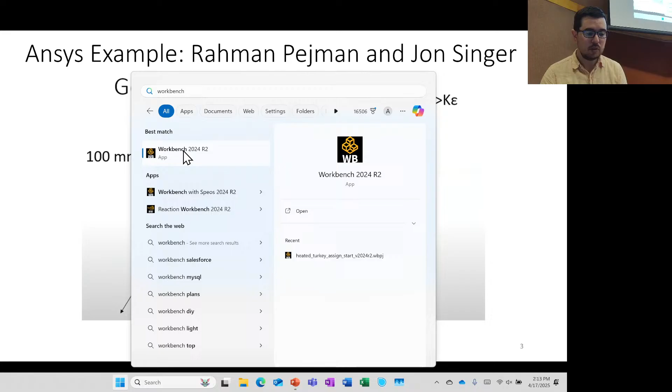So we're going to open up Workbench, and first run a 2D simulation. And then Rahman does a nice job of taking that 2D and showing you how you can create a 3D, essentially copy and pull the thing to have some thickness, and then run the simulations again. So we're going to be first working with Fluent, and then later, if we get it to work, we'll get Fluent to talk to Static Structural, and that will be the one-way coupling. So here we go. We're going to do geometry 2D, and we're going to open up SpaceClaim.

And while SpaceClaim is doing its thing, let's analyze the geometry a little bit here. We're going to be 200 millimeters wide, 100 millimeters tall. Okay. We've got 1 centimeter per second for the flow on the inlet, and the Reynolds number is going to be about 1,000. So how is that calculated? Well, that was calculated by, let me see if I've got it.

Oh, pen. So the Reynolds number here, if my pen will work. Oops. No. Okay, let's see what happened. Whoa. Okay, so the Reynolds number is going to be rho times velocity times some distance, okay, or some length.

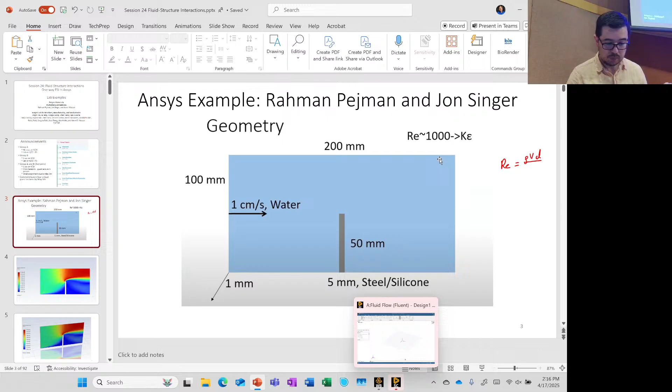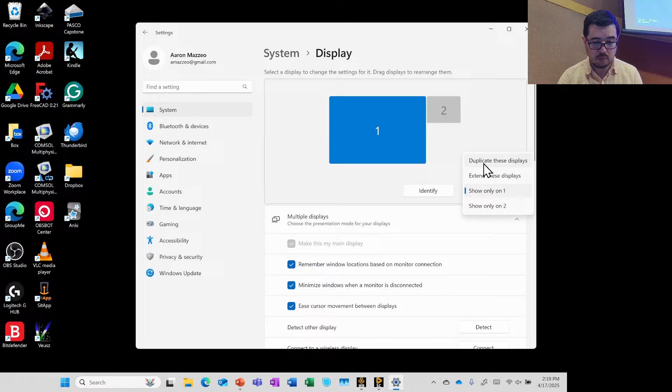You gotta be kidding me. This has happened before, when everything, oh no, oh no. It was bugging out a little bit before. Let me try this other cable. See, that makes sense. No, it works. It takes so long. What's up? All right. Sorry, it works. All right.

So we get rho VD over mu for the Reynolds number. Density of water, anyone? 1,000, right? Kilograms per meter cubed. This is going to be 0.01 meters per second. And the distance we're going to use is going to be this 100 millimeters, that height. So this is going to be the 0.1 meters.

The viscosity of water. Anyone? Fluent database, click, water, liquid, copy, close, forget about it. All right, that's what we normally do. Okay, so the viscosity of water is 1 millipascal second. Okay, so 0.001 Pascal seconds. All right. So now let's get to the geometry.

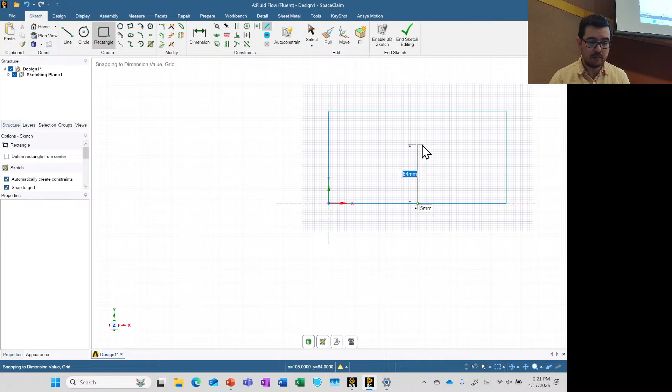In SpaceClaim, we go ahead and we click on the Z. We click on the sketch plane. We can click on that again, I guess. We click on the rectangle. We're going to do the 200 millimeters wide, 100 millimeters tall. That was just a tab. And then enter. And then we'll put in that center pillar. So you can come over here and it says a center line. All right. And we'll click on that. And then we're going to do 5, hands off mouse, tab, and then we're going to do 50, enter.

Okay. Then we come over here and we hit the select button and we drag it over the geometry. Okay, and we can click fill. All right, and it does this. Then we come over here to the surface and we're going to detach them, detach all. Because we want to be able to separate the fluid portion from the solid portion. So we hit detach all. And now we see we have 2 surfaces.

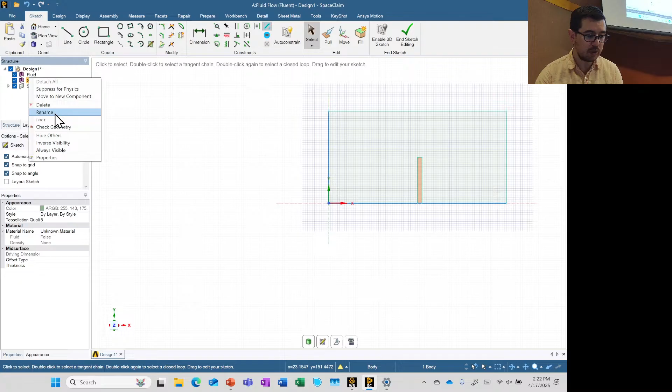This one we're going to rename fluid portion. And this one right here is the solid portion. Okay, and Rahman says we click that box to get rid of that so we don't have that activated. And we should be able to go. So we just do close on that. And that should bring us back into Workbench.

Okay. For the mesh, when I've double clicked on this and started doing the meshing, I get an error. Maybe it will come up, maybe it won't this time. That was something that was kind of unique compared to what happened in the 2022 version. So what I do is I just close it and I try again, and that seems to have taken care of the error that came up.

With this part of the problem, we're only going to be looking at what's going on with the fluid, right? Because we're doing the one-way coupling, okay? And so first we're solving the fluid problem. So this is kind of like a problem where you have fluid over an internal body. And we're not going to do the deep convergence, right? Okay. So let's see. It's still thinking. Let's just go back here for a minute while it's thinking.

The fluid flow rate, the inlet. Well, we're going to end up specifying inlets. We're going to end up specifying a fluid structure interaction boundary around here. This is going to be the outlet. And then we're going to have symmetry, okay? So that would be like a no shear condition at the top. There's going to be no slip, which is essentially a default for Fluent, on the bottom.

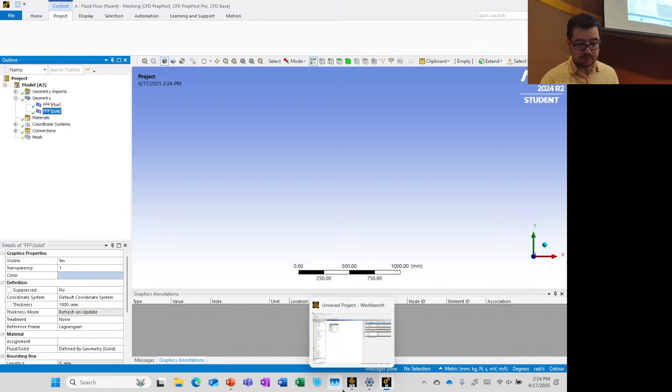So your lab is going to be this, essentially, by the way. So that was the other reason I wanted to do a demo. And I was like, well, I could record it, or we could just do it here. And given how things were going, I decided that we'll try to do it here.

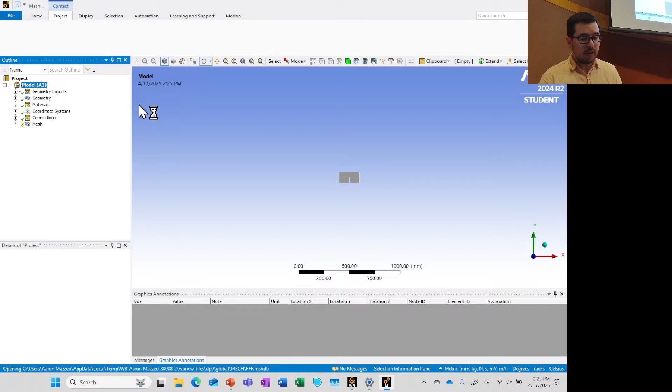So that should be closing, and then now we'll just double click, or I right click or edit, and we open it up. And it should work. Okay, and so now it comes in. I don't know why that happened, but this is good. All right. So we want the fluid, but we don't want the solid. So we're going to go ahead and suppress this body.

Okay, and then we can go ahead and name our inlet and our outlet and our various boundaries of importance. So if I left click on that after I've got edge select and then hit N, we'll call this inlet. This is a reserved name. This top one, N, we can call it symmetry. That also is a reserved name by Fluent. Click on this one, hit N, type in outlet, also a reserved name.

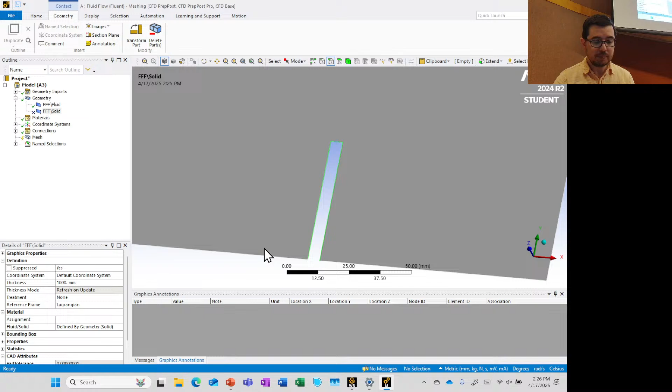And then we need to select, so we did this one, and then control. Okay, I guess I didn't. I thought I got the middle. I guess I better zoom in. Right, like that. Okay, so those three, and I hit N, and we'll call this FSI. So that's going to be where the fluid structure interaction occurs. We hit OK. Then down here, we should see those are where we want them to be.

We go to mesh, and in this case, we're going to use an element size of 1 millimeter. So your settings might be a little bit different. I'm in metric millimeter, right? So if your settings are different, then just make sure you get the right units there. We're going to actually add an inflation where the no slip boundary conditions exist.

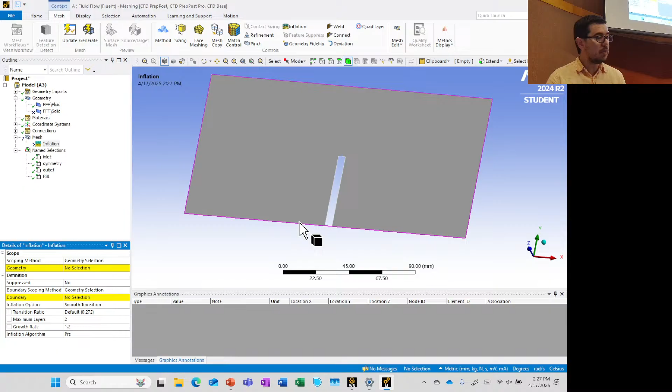Okay, so first we select that whole thing, then, oh, but I have to hit apply. Oh, no, well, first I have to do that, then I have to hit apply. Then we're going to select this one, control, this one, control, that one, and that one. Okay, and we hit apply. We should have 5 edges selected, and we'll go up to 5. Okay, now we can generate the mesh and take a look.

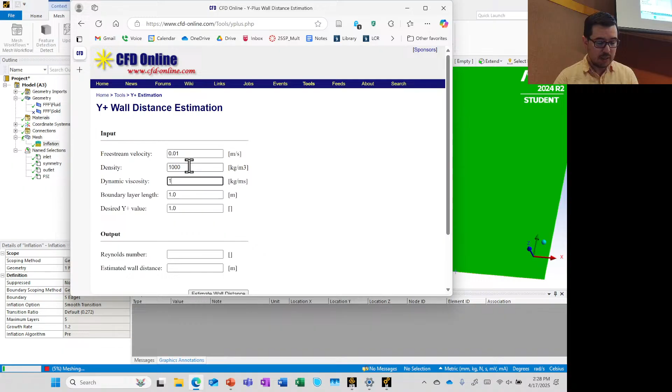While this is happening, you might recall that you can use a y plus calculator, or y plus distance estimator, and we're going to use it for the 2D, but we're going to ignore it for the 3D actually. So you can type in the free stream velocity, which is 1 centimeter per second. The density is 1,000. This is water though, right? We said that we had 1e-3 for our viscosity.

The boundary layer length, is it 0.1 meter or 0.2 meter? We'll just put in 0.1 meter, okay? We keep the desired y plus value at 1, and we estimate the wall distance. So this is saying that we have a Reynolds number of about 1,000, which we do, and for that, you want to make sure that your layer right next to the wall is less than this number. So this is 0.97 millimeters. All right, so it's about 1 millimeter.

So once this thing has been meshed, you can see that it's refined along these no slip boundaries, and you can go in here, and this is not super precise, but you can click on the node, and we can click on, say, that one and that one. Whoops, I said I had to hit control. Now I got neither.

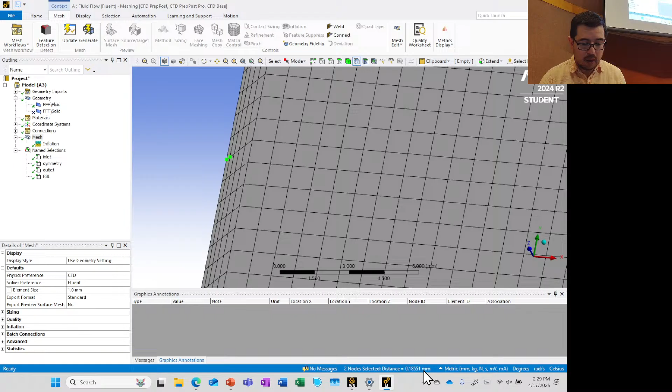Okay, and you see down here, it says it's 0.18 millimeters, 0.19 millimeters, and what did we say? We said it had to be like 0.9 millimeters was what we were aiming for. So the thickness of our elements right next to the walls is less than what you want for your y plus. We'll ignore this in a little bit, okay? But it's just good to have a reminder about this behavior. Okay, so we're good here, and we'll go ahead and hit update.

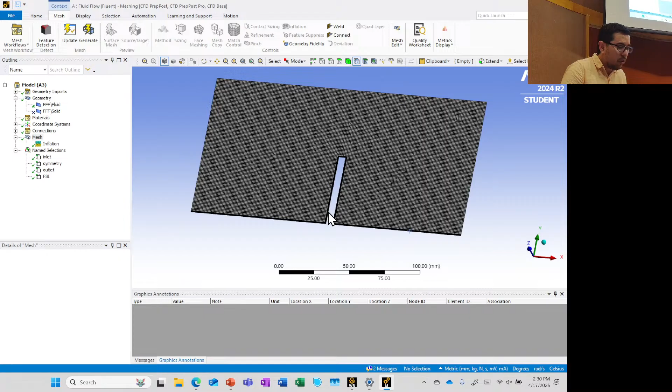And this has been transitioned or translated to Fluent appropriately, okay? Or it's ready for Fluent, I guess you could say. It's going to Workbench, and in Fluent, we're going to use the K epsilon turbulent model. Now, if you like, you can look at K epsilon, K omega, and again, we're doing kind of an impressionist perspective on a lot of these things at this point.

But if you look at which should I use, K epsilon or K omega? If you read this, what it tells us is that it's solving for turbulent kinetic energy and epsilon, or the rate of dissipation of turbulence kinetic energy. And the nice thing for us is this phrase, good convergence. So it may not be super accurate, and we're not necessarily going for accuracy in this demo, but it has a good convergence rate. So this is maybe one that we might want to attempt first.

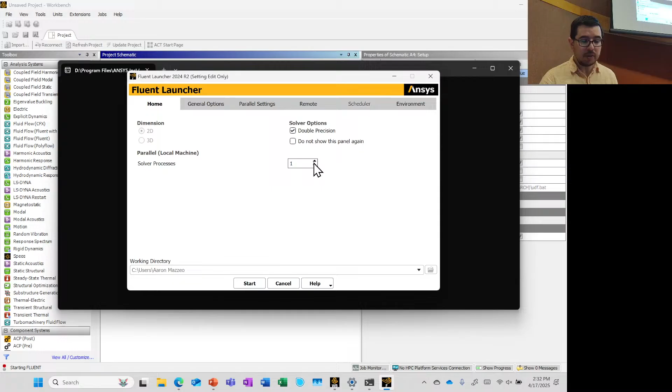K omega, it says more difficult to converge than K epsilon. So that gives you kind of a hint. Maybe I should try K epsilon first. Okay, so now we go into... Oh, I should have clicked on Fluent earlier. To Fluent. And we'll go ahead and do double precision, and we can up it to 4 cores or processors like that, and we hit start.

This is just a 2D simulation, but what we're going to do here is get a perspective on what's happening with the 2D flow, and then we're essentially going to make a 3D slab. It's going to look like a plane strain problem essentially, and that plane strain problem is going to involve a 3D solid model. So we're doing the 2D problem to get an idea of what things should look like in a thick 2D slab, and then we're going to extend it into 3D so that we can solve the solid mechanics problem in 3D, if that makes any sense.

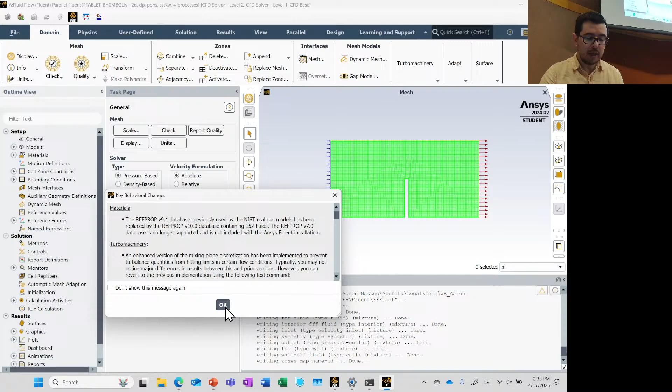Okay, so here, what we're going to set first is our model. It's got SST K omega. We're going to go ahead and use K epsilon. That's what Rahman did. And for the materials, we can look at our fluid material, which is only air. So we'll put a new one in, go into the Fluent database, go down to water liquid, and hit copy. And just to see, the viscosity is 1 millipascal second, or 0.001003.

So we close this, and we can close this, and we see now that we have water liquid. We come over here to the fluid zone, and we can double click on it, or right click on it and hit edit. We're going to change to water liquid, apply, close. For the boundary conditions on the inlet, we're going to have a velocity of 1 centimeter per second coming in on this side. So we'll change that to 0.01 meters per second, apply and close.

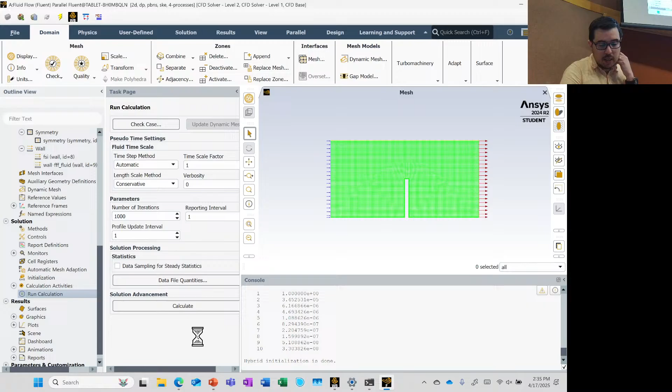This is set, the outlet is set, symmetry should be set, and the walls should all be no slip condition, and we shouldn't have to change them. Stationary wall and no slip. So we come down a little further to run calculation. We double click here, and we can up our number of iterations. We're not going to use all of them, but put in a number greater than 50 or so, and we right click and hit initialize and calculate. It's going to use the default, which is a hybrid initialization, and it should solve pretty quickly.

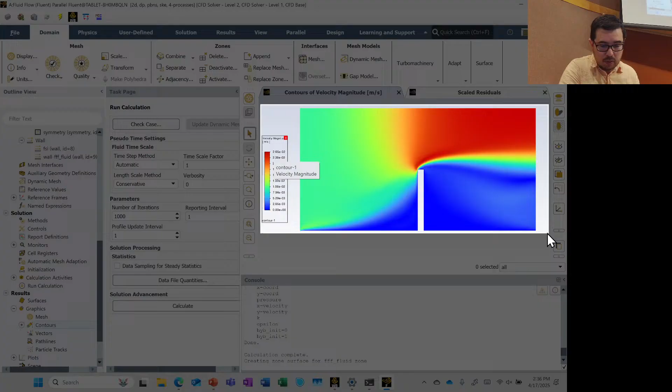Okay, so less than 60 iterations it took. And if we come down here to the graphics, we can click on contours, right click, new, and we'll look at the velocity, save, display and close, and that looks pretty good because we've run it before. You probably can't see it. I'll go ahead and try to copy and paste it. But actually I know what it is because I've done it already.

It's about 2.7 times 10 to the minus 2, so 0.027 meters per second as the maximum. And that lines up with what Matt said at the beginning of class. You were saying it constricts the flow, and so we expect it to speed up. So it goes from an inlet flow of around 1 centimeter a second to over 2 centimeters per second in this region. And it's slower, pretty stagnant down here behind.

Now, no, don't do that.

Please, okay. Last time that crashed everything. So let's go back here and we'll just work here and see if we can get through things. Okay, so this is pretty good. We'll go ahead and close this. And we can hit OK here. Often I say use it, keep it for future, but in this case the top option is fine.

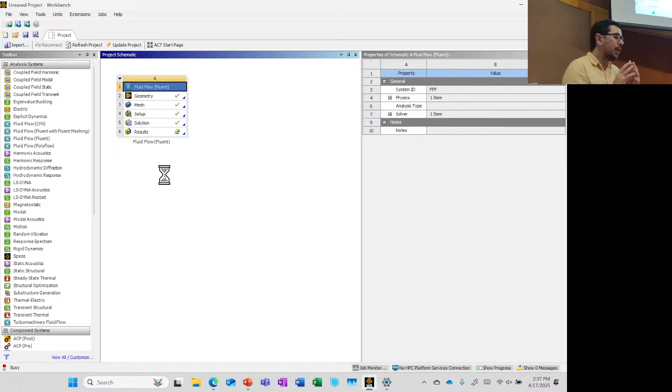So now we go to Fluent, or this analysis, and we're going to right click here and we're going to duplicate. So duplicate, and this is going to lead us to transition to 3D. And again, the reason we're making the fluid flow 3D is just so that we can use 3D structural analysis, or static structural, down here in a minute. So it's thinking about it, and then we click here, and it's 2D geometry, but we're going to change that to 3D.

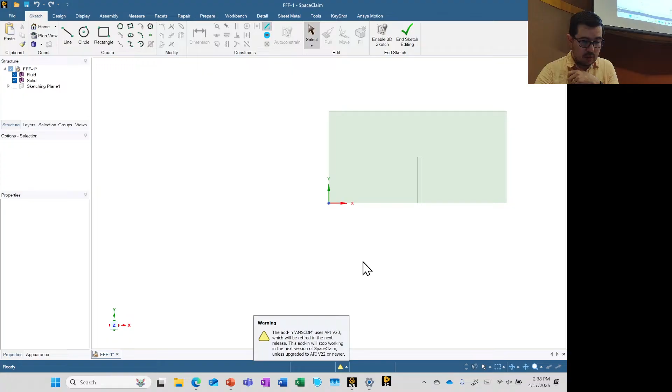And then we're going to open up the geometry in SpaceClaim. So we're going to specify a thickness or a width if you want. So we got this 2D flow, and we're going to kind of pull it out and make it 1 millimeter thick. And we're thinking. All right. So good. It looks like it's come in. That's pretty good. So we can kind of rotate it up. We can zoom in a little bit.

And we can move things over, and we can kind of select everything, and we can do a pull like this. And we click there, and you remember, my left finger is on the mouse still. I hit 1, and then I hit enter, and it's almost still 2D, but it is in fact 3D now. You can see there's some thickness there. In this case, I needed to do pull no merge. All right, so we saw that.

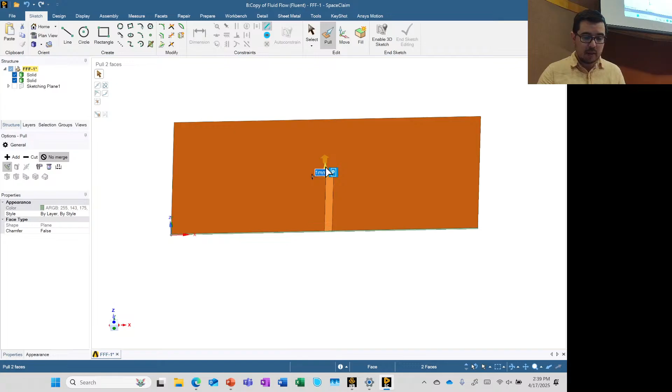So let's go ahead, undo what we just did, come back here, and we do no merge. And then we do a pull. Now do 1. Okay, now there are 2 solids. Once again, we don't want both solids. They're not both solids. One's fluid and one is not fluid. So this one is going to be renamed to be fluid, and this one doesn't need to be renamed, it's solid. That's the middle section.

Okay, I'm not quite sure if this is superstition or what, but I think you're supposed to click on this. Okay, well maybe not. There, it's activated. So you're supposed to click on that, and then we hit close.

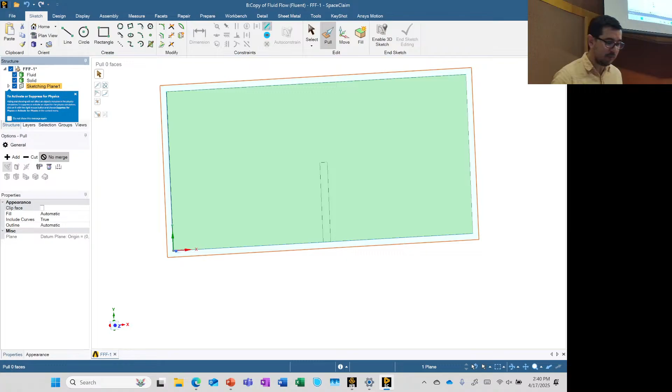Then we go ahead and we're going to work on the mesh. Now, in the mesh, there are going to be a couple things that we have to do. We're still looking only at the fluid portion of the problem. Yes, we're going to take the updates. But you remember those named selections that we had for inlet, outlet, symmetry, they were before applied to edges on the 2D problem, but now we're going to apply them to the faces. And so we'll come up here to the geometry.

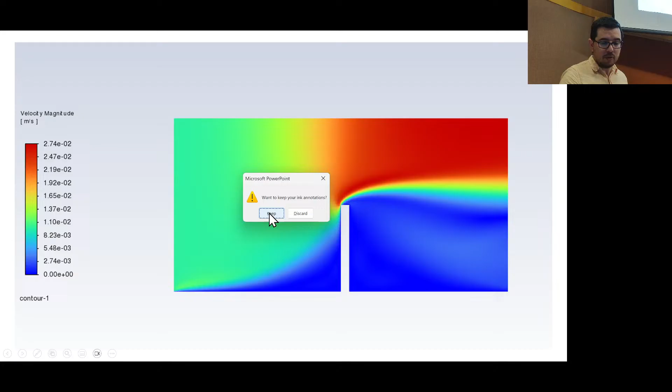Okay, we're still waiting, I guess. Still waiting. While we're waiting, I don't know if I want to do this. Okay, great. It stayed. It did not disconnect. That's good. I was worried it was going to disconnect from the screen. Okay, so here we are.

It's giving us some kind of mismatched scope business. This is a newer thing. I don't really look at this that much, but it highlights. It's newer than 2022 at least. And so when you come into here, you'll see it's saying, hey, there's an issue there.

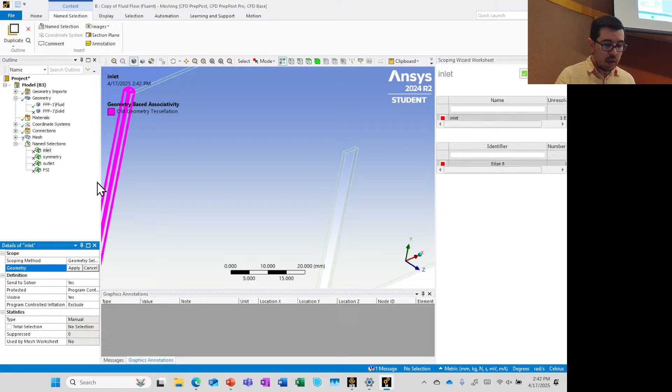But let's first go ahead and suppress the solid again. So we're going to suppress that body because we're only interested in the fluid portion. And we're going to come over here to our named selections on the plus. And the inlet, it's like, hey, there's a problem. So now we're going to use our surface or face selector.

And we're going to, oh no, okay, attempt, there we go, to select that face. And then we hit apply. And so now our inlet is that. Okay, and then over here, it's hard to see again, all right, but we're going to click on that face. We're going to hit

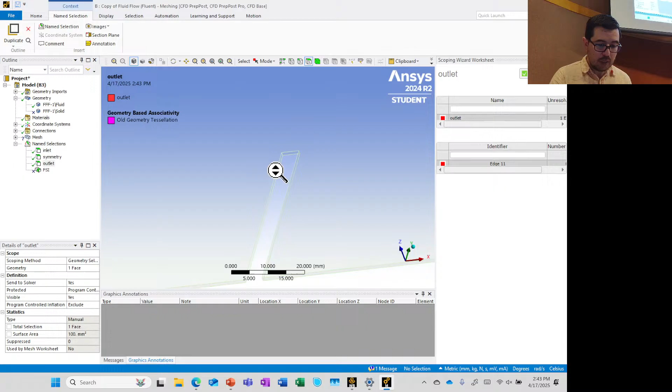apply. Okay. And over here on the back side, we can go ahead and select this face for the outlet and apply. And then down over here, we're going to make these FSIs new. Okay, I didn't even remember it had a couple. But we're going to select this one, hit Control, and then hit, whoops, not that. Hit Control. Okay, so we should have those 3 faces selected. Apply, 3 faces. We're good.

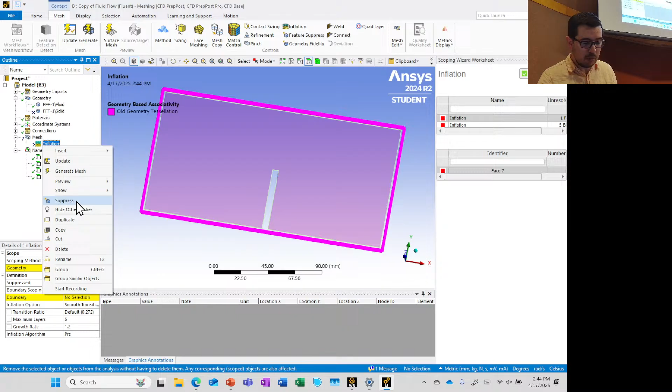Okay, it remembers that we wanted 1 millimeter mesh. Okay, and so that's fine. Now though we're going to take the opportunity to essentially tell it that we want it to have a mesh that sweeps through the thickness of the part. So first we're going to ignore the inflation. This is where we did all that nice y plus calculation work, but we're just going to ignore it for now. So we're going to suppress it, and then we're going to insert a

method that is going to apply to this entire geometry, and we're going to use a sweep. What it's going to do is sweep through this with a quad. We're going to say all quad, so it's going to have square elements on here, and we're going to do this not automatically, but we're going to use a manual source, which is going to be this face, like that. Okay, and then we hit generate.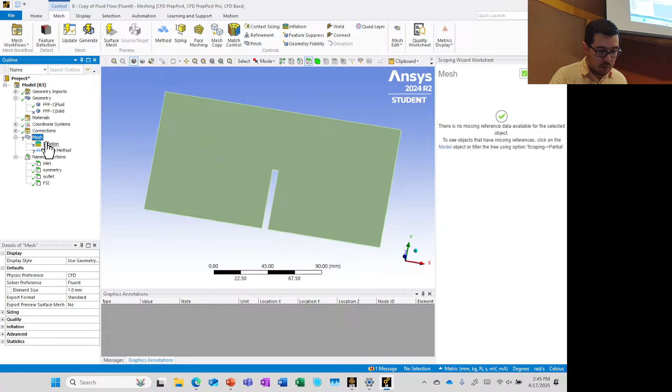It's not associated with any geometry. What? This is a new one, I'm not sure. So this is suppressed. Use geometry. This may be where we end for now. Yeah, we're using geometry settings, sweep method. What is it lacking? I don't know why it would, I don't think it needs sizing there.

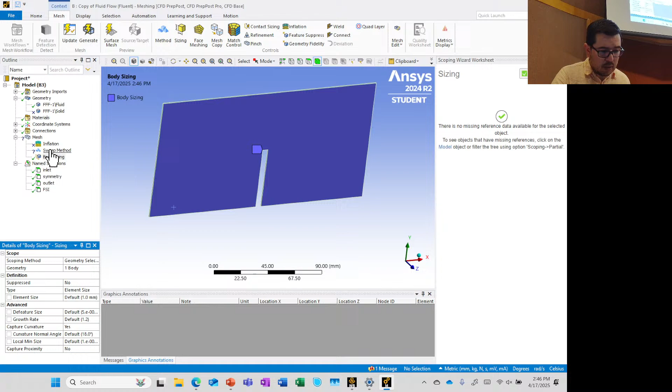Okay, so that's, no, I want it on the whole body. Okay, so that's body sizing. That's 1 millimeter, that's fine. 1 body. Oh, it's because, blast. Because I hadn't hit apply. Feel free to yell at me when that happens. Sweep method. Click on this face, hit apply. Now we've got a face. Now it should be able to generate. Thanks for bearing with it.

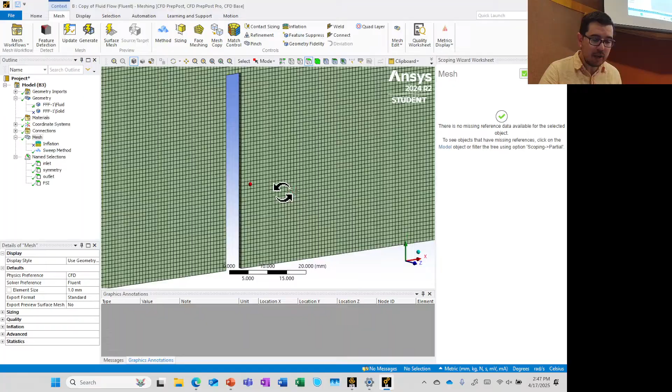Okay, so now the mesh, yep, it looks pretty good. It doesn't have the inflation that we had on the other one. We're kind of ignoring that issue, right? But you can see it does go through the thickness, and it's essentially one element thick. Now, actually, I should have remembered this earlier, but for the symmetry, you recall that we were looking at a 2D simulation, which is essentially a really thick slab,

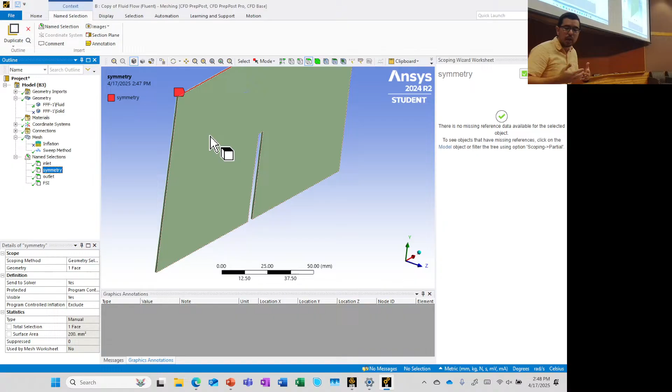now, since we've added a thickness to this simulation, what we actually need to do is extend and say, we don't actually want no slip. We're not trying to get the water to squeeze right through this 1 millimeter thickness. We want it to essentially be a 1 millimeter thick representation of a very wide tank. And so to do that, we do symmetry, just like we had no shear on this top surface. We want to add that to these other surfaces as well.

Okay, so there we go. We've selected them, and actually, I think I probably need to select the top one as well, just to add to the fun. And here, instead of it being 1, now it's going to be 3 faces. I forgot to do that earlier. I'm glad I caught that. All right, so this should be good. Let's go ahead and mesh. I don't think it's going to change anything there. Let's update the workbench. And the mesh has been translated. Excellent. So now we close.

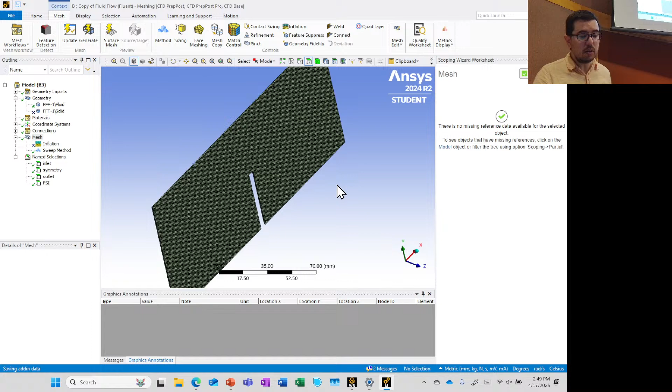Let's go ahead and get into Fluent by clicking on the setup. Yes, we want to load the new mesh. And Fluent is going to say a couple things to us. It's going to say, your zones have changed. You were doing a 2D problem before. Now you've made it a 3D problem. So how should we handle this? And it was a little bit different error than I saw when Rahman used 2022. So let's see. It's thinking.

Okay, so it says note, 2D, okay, there were a couple things here. There were a couple errors, but one is a note: 2D double precision pressure-based standard K epsilon case read into 3D double precision pressure-based standard K epsilon solver. Great. But the model information is incompatible with the incoming mesh. It says it's found some missing and new zones in the mesh.

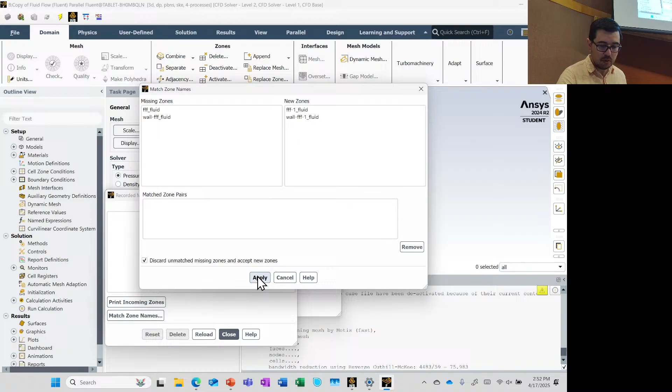Okay, do you want to reload setup? Yes. Okay, so then what you see there is it renamed these zones. There were missing zones that they had, and then it added like a 1 there. So now these new zones should be all that we need. And yeah, we did it. It's working. So this note, 2D double precision pressure-based standard K epsilon case read into 3D, so it's fine. We hit close, we hit OK.

All right, so it says it's out of date. That's not nice, but things are going to be just fine. And what's nice about when you do it this way is it actually remembers that you're doing K epsilon instead of K omega. It remembers the fluid that we're using. The fluid is water. If you come in, it's water liquid instead of air, and it's kept everything intact. So the only thing that we should really have to do is come down here and initialize and

okay, yeah, because see the other thing it did. If you look at the boundary conditions, just a note, it also brought in symmetry, so it brought in those 3 surfaces instead of just the top surface. And it has the walls, fluid structure interaction walls, and it has the bottom. So we should be good to go. We can go ahead and go to initialize and calculate. And it might take a little bit longer to run. It might not. We'll see.

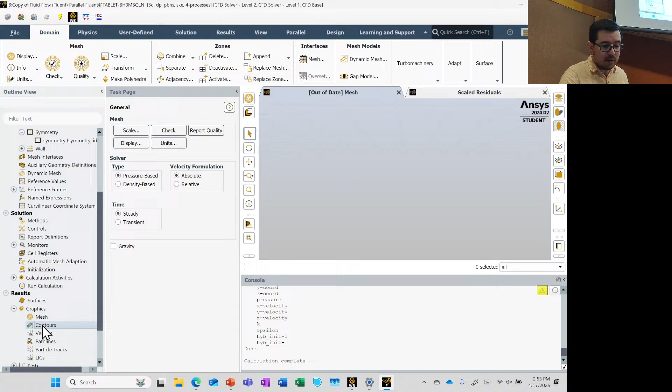So yeah, remember before it was done before 60 iterations. Now it's taking over 100 iterations to run. It still is disconcerting, it has scaled residuals, but there's nothing here in the visual, which is a little disconcerting. But if you come over here and you go to graphics, contours, and you right click, new, and you click on, let's say, the velocity, you hit save display, voila, there it is, and it's in 3D.

And you can kind of tilt it, you can see, yes, it's in fact 3D. And if you're annoyed that you can't quite get it back to how it was, then you can join the club, but you can click over here, and this little thing comes up, and you should be able to click on the Z, and so now you're looking at that perspective.

The other thing that's good, you may not remember, but this says 2.7e-2 meters per second, and that is reflective. Remember, it was 2.7 before, about 2.74, and now in 3D it's in the same ballpark. This is what I copied and pasted previously. So this is good. I'm excited that we've gotten this far without a catastrophe at this point.

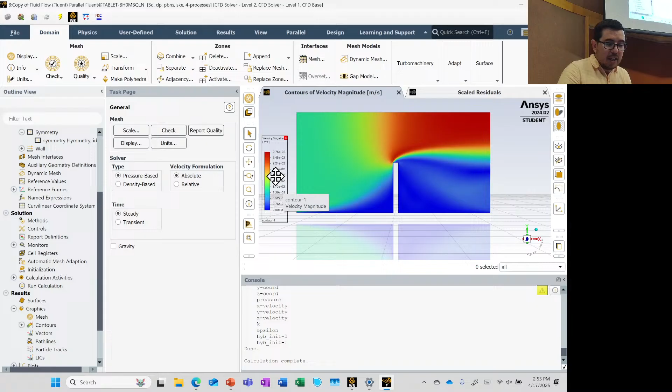Right now, what we'll do is we'll just go ahead and close this, and we'll say, sure, we're done. And we will go back into the workbench. And we're going to start looking at how we can couple the structure to the pressures that have been induced by the fluid flow. So for that, we bring in static structural over to the solution.

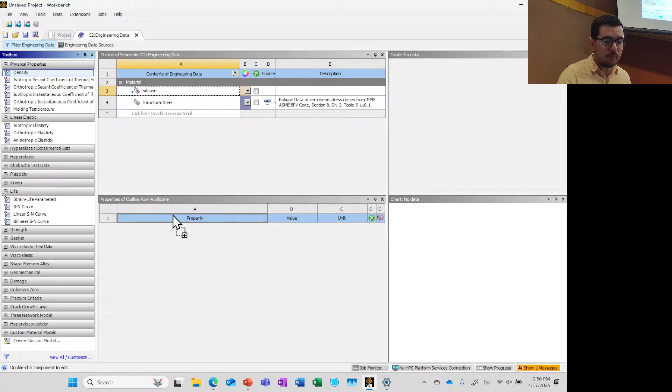And here, it now gives us an opportunity to think about what materials we're going to be using. So in the engineering data, we have structural steel, and we'll use the structural steel as our first case. And remember, in one-way coupling, structural steel is probably fine because it doesn't have much deflection. But we'll go ahead and create a new material called silicone. And for silicone, we'll give it some density, and we'll come over here and give it some elasticity. So the density of silicone, any ideas what the density of silicone is?

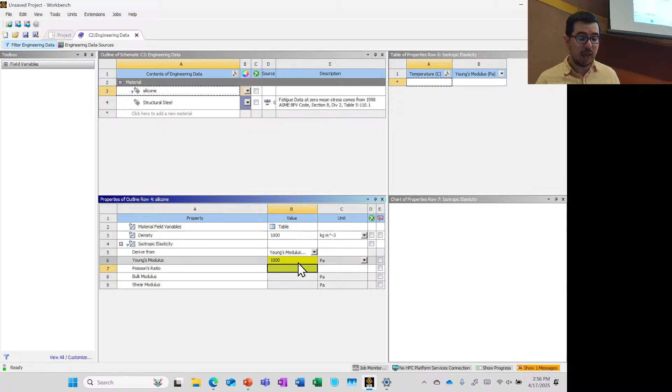Close to water. Let's use it. 1,000 kilograms per meter cubed. Now the Young's modulus: silicones can vary quite a bit in terms of how soft or hard they are. And yes, hardness and softness are not elasticity, not Young's modulus, but they're very much correlated. So we'll say that we're going to start here with 1,000 pascals. That's really, really low. Okay?

And Poisson ratio: these are rubbers, and so they're incompressible. They conserve their volume, but you can't put in 0.5 for the Poisson ratio because things will explode, so we put in 0.49. Okay? Oh, except I put it in on top. Okay, so 1,000 here, and then over here we put in 0.49. Okay, and then we close this.

Now, for the next part, we are going to leave the geometry as it is and just go into the model. Okay? And we're going to ignore the fluid portion, and we're going to emphasize or highlight the solid portion.

And we also are going to have to add some boundary conditions. So you think, oh, well, that beam was, of course, just fixed in that geometry? Well, yeah, but we need to actually tell it: this is where you're going to be fixed. This is where you're going to feel the pressure from the fluid. And the walls are going to be frictionless. Okay, so we didn't talk about this too much.

But imagine, we've got this 2D or 3D slab, but it's simulated kind of almost like a 2D system. And these walls, are they connected to more material? Well, yes, the way we're solving this problem, they are. So we're going to say that on this wall, it's like a frictionless support that has other material going along.

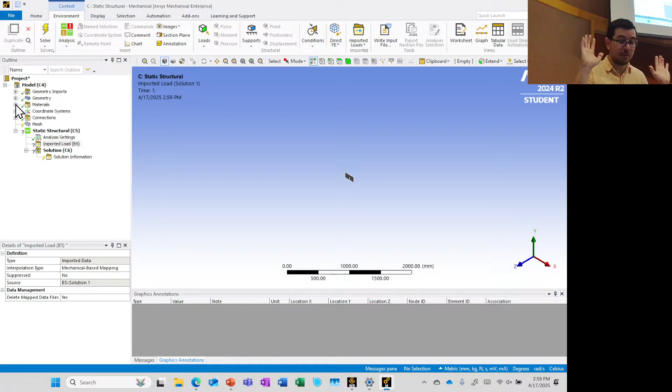Yes, this error has come up for me before, and you get scared. At least I got scared, but I ignored it. So you just ignore it, and everything seems to be okay. Now, for the geometry, we're going to suppress the fluid this time, and we're going to look at the solid. And all it is is this little beam.

We can mesh, and then do you want to do boundary conditions first or mesh? We'll go ahead and do mesh, I guess. So the mesh is going to be a little bit different. We're going to insert a sizing, and there's no one way to mesh, but here Rahman decided to do it this way. We're selecting that top surface, and we're going to use, again, 1 millimeter. So it's going to essentially create like a little grid there. And then we're going to sweep it to the bottom.

So in this case, we're going to add a method where we have the geometry, the entire thing selected. I hit apply, that's good. The method is going to be a sweep. So we come over here, and we're not going to change it to all quad this time. I guess we could, but we're just going to leave it there. And this top surface is the source one.

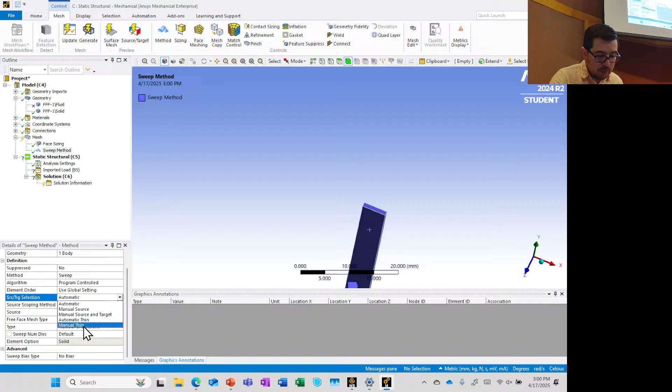So we do manual source, and then we're going to click on the face. And it said no selection. That's what hung me up last time. And we're going to let it go. So then we should be able to generate a mesh here. And it's not super fine. Okay, good. It looks good though. This is the same mesh that we use. But this thing is bending in this direction, like that. And you don't really need that many elements to capture that behavior. Okay, so that's the mesh.

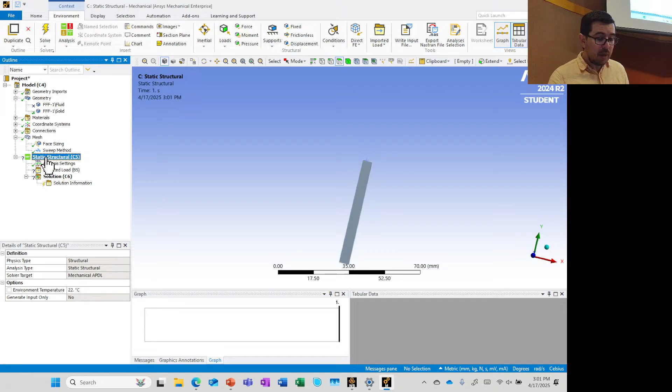Now let's talk about the boundary conditions. Well, the bottom of this is fixed. So this is the bottom that we had. So we're going to zoom in, and we're going to click it right here, and we're going to hit apply. And then on the sides, this side and this side, those are going to have the frictionless supports, because it's as if this is part of a big plate that's being hit by the water.

So we come over here, and we click frictionless support. There and there. Whoops, except I had to hold control. Okay? And I hit apply. And now the moment we've all been waiting for, well, maybe not the moment, it's not the climax, but this is maybe like the rising action. We're going to couple the systems.

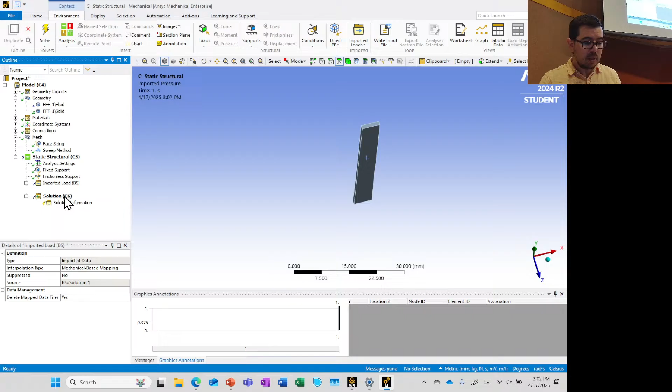So you see this is static structural, but it says right here, it has an imported load. This is a load it took from the Fluent simulation. So we're going to insert pressure, and we have to specify where that pressure is acting. That pressure is acting on this surface and this surface, just like that. And it says no selection, so I better hit apply. And I think we're almost there.

Now, in our solution, we're probably interested in deformation, right? We saw that before. And maybe we're interested in stresses.

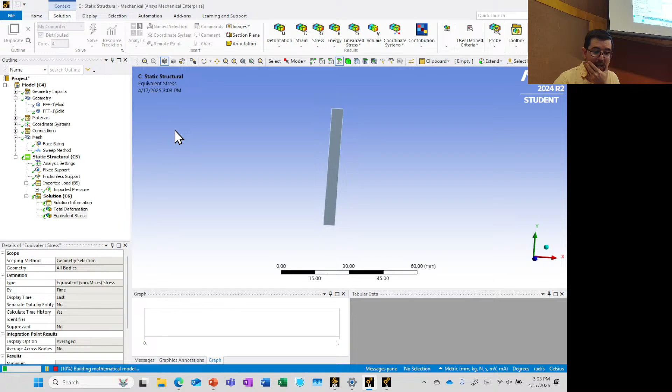Okay, so we can do von Mises. Okay, let's go ahead and solve. This is the moment we've been waiting for. Will it converge? Was the last 30 minutes in vain? 40 minutes, maybe more. All right, it looks good. Well, I think it looks good.

Here's a deformation. All right, so now, do you think that this deformation is causing problems for the fluid flow? Oh, you could say it kind of looks like it could be. But then you come up here and you look at the auto scale, and it's magnified by 2 times 10 to the 7th. All right, so if I do true scale 1, boing. All right, this steel is not deforming.

Okay, now is there stress in it? Yeah, there's some stress, but not much. Okay, and that kind of makes sense, right? You've got some fluid, it's not a big deal, it's not causing it to experience that much stress. The equivalent stress is very, very, very low. Okay, but nonetheless, we're happy.

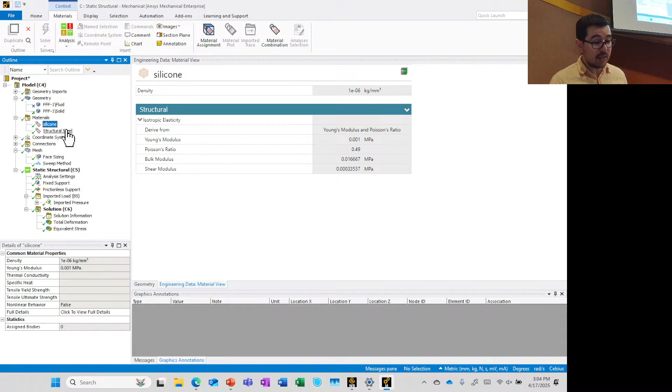Now, what if we change the material to silicone? All right, so here's our silicone. We said, hey, look, the Young's modulus is 1,000 pascals, or 0.001 megapascals, or 1 kilopascal. And structural steel, its Young's modulus is up at 200 gigapascals, right? Big difference. So what we do is we come over here into the solid, and we say, you know, you had structural steel as your default. Let's change it to silicone. All right? And now we can go ahead and hit solve.

Okay? And it says it's got large deformation. Yes, it's true. Okay? And if we click on total deformation, whoa! All right, it's bent over. And that is at the true scale. Okay, that's at the true scale.

Now, for the lab, what we're going to do is have a graph that you spit out. Well, you don't spit it out, but you plot it. That is the maximum deflection versus Young's modulus. That's the plot that you want to create. So we're going to change the Young's modulus. How do we do that? We're going to parameterize it. How do we look at the maximum deformation? We're going to parameterize it.

Okay? So here, if you come down here, for this system, you don't have to click to see, but it says that the maximum deformation is 19.8 millimeters. Okay? So that's about 2 centimeters. We click on this little box here, and it puts in a P. That now means it's been parameterized.

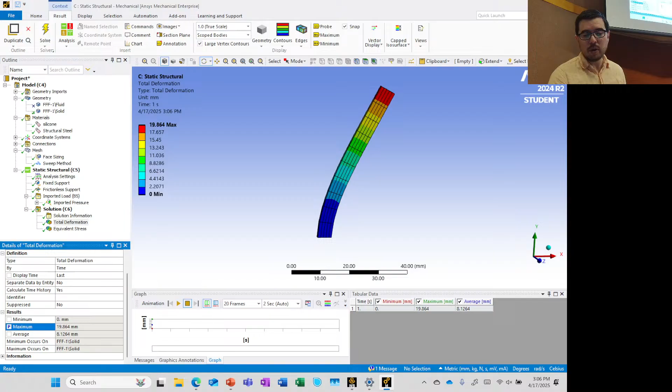We then come over, close, and we go back into the engineering data, and you see now it's got this output. It's going to be the maximum deformation, and then we're going to go into Young's modulus, and we're going to click on this box over here. And now it will be parameterized. It's got this little thingamabobber here in column E. So we close this, and now we see a loop. And then we go to update all design points.

Okay, except we have to, first. Okay, we double click on that. Yeah, it updated, it was the same one, right? And so let's say, I don't know, we want to put in 2,000. Let's say we want to put in 10,000. Let's say that we want to put in 20,000. Say that we want to put in 1e to the 5. Whoops. Okay, it doesn't like that. So I guess I got to do 100,000.

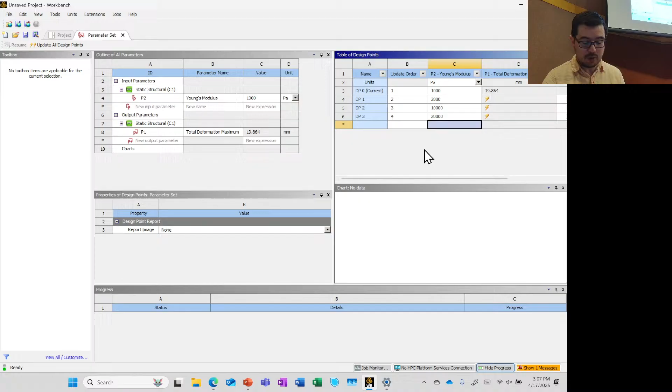Okay. What do you expect to happen? Will the maximum deformation go up or down when we increase the Young's modulus? What do you think? Will the deformation increase or decrease? I see a down, right? I see a couple downers, okay? So let's go ahead and we click update all design points.

And unlike some of the things we've done with Fluent, since we're only doing this parameterization on the static structural, it actually updates pretty quickly, okay? I'm telling you, Ansys, come on, I'm giving you praise here. Please cooperate. Okay. So it's updating.

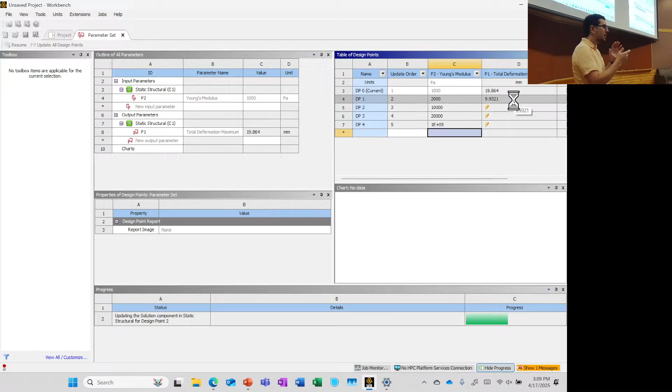And there weren't that many elements in that beam either, okay? So we can look and we see the progress. Oops, it already gave us one answer. Okay, so we see at 2000 we double the Young's modulus, and the maximum deformation went down by about a factor of 2. And you remember we had those PL cubed over 3EIs, and we had other equations for the deformation with like distributed load on a cantilever beam.

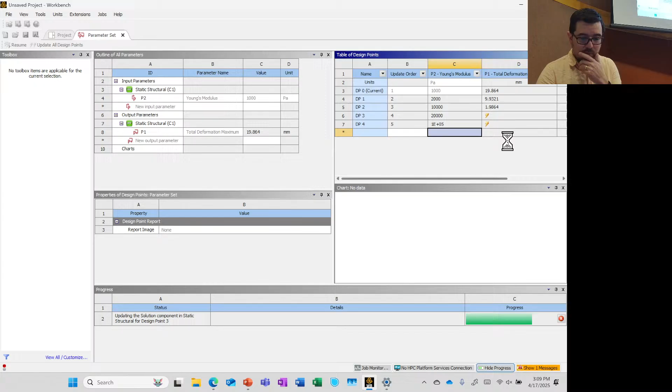E was often in the denominator. Often the maximum deformation, the maximum displacement, was inversely related to the elastic modulus. So these results do make sense. So your job for the lab assignment is to go ahead and run these types of simulations. And we see here that it's pretty much a factor of 10 exactly when we went from 1,000 to 10,000.

In the last few minutes that I have with you, I just want to share a very quick overview of some of the things that we've done in our lab that have involved fluid structure interactions. And they're very frustrating in many cases. And if you want, you can see a more in-depth presentation that I gave in the spring. It's there for your viewing. But our lab is an experimental lab, and we don't simulate everything.

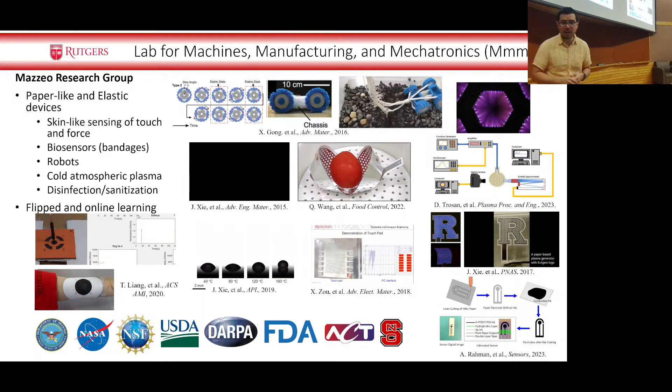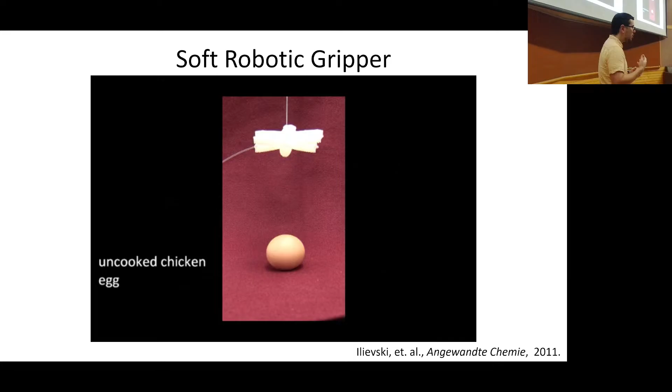So soft robotics now has been around for quite some time, and I was privileged to work with some wonderful people, very creative, very smart people who are still contributing. And so this is kind of an example, maybe not so much of a fluid structure interaction, but what you have is air pressure that's going into this device, and it's causing it to deform, and then you can pick up an object.

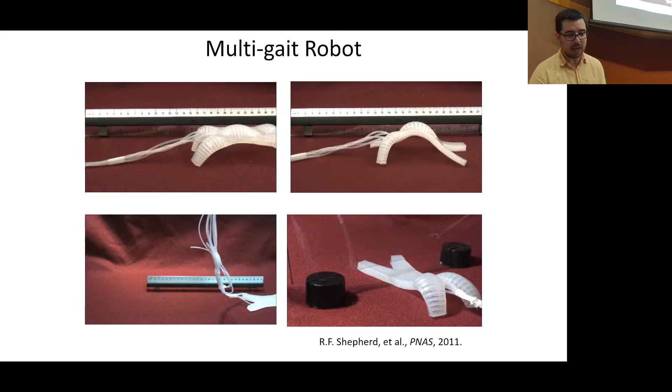Before I came to Rutgers, there was another paper, and this one was led by Rob Shepherd, who's at Cornell, that had to do with putting multiple chambers in a robot to allow it to kind of move and wiggle and look interesting. Again, we were doing these experiments and we were not waiting for people to simulate the behavior. This behavior is pretty complex. But I was involved in some of the efforts to do some modeling back then. And a little bit later, I'll show you some other stuff with soft robotics, and I'll come back to this if I have a moment or two.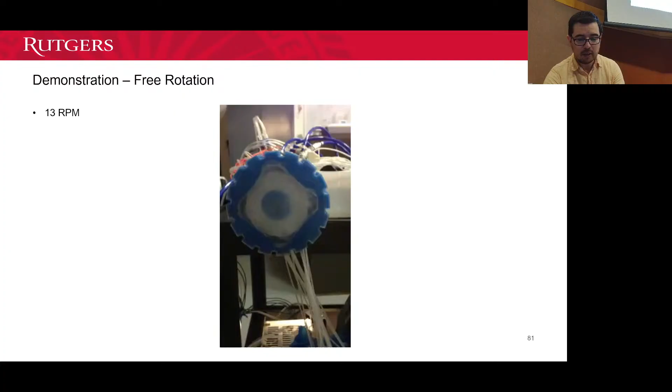When I got to Rutgers, we had a very creative student. Okay, let's see. Where's this stuff? Yes, a very creative student. And yes, we got accused of reinventing the wheel. So what you see here is a stator, static, not moving, in the middle, and it has a bunch of bladders around it. And Kevin had this idea. And then Shang Yu was the one who implemented a lot of this, and he's the first author on the paper. He had the idea that if you inflated these things in series and had this interesting outer shell, you could get rotation.

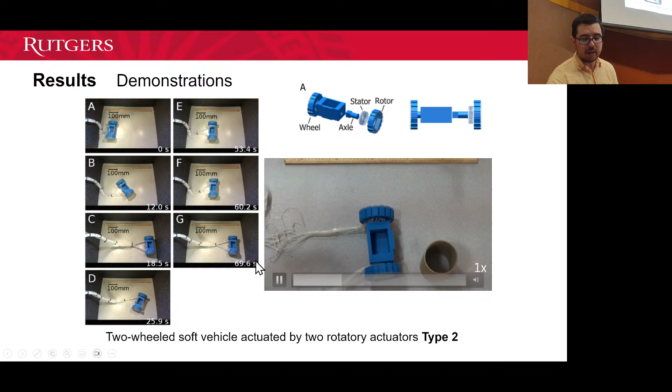And again, we said, okay, well we can make something. If you put the stator on the outside, it's a winch. And if you put the stator on the inside, it's a wheel, and it has some propulsion. So we characterized things as we could. And you can see these things move around. They're kind of fun, like this, right? It's springy, spongy, kind of wacky, and quite frankly, it's frustratingly fragile. Even though it's rubbery, to get these things to work required a lot of time and a lot of effort.

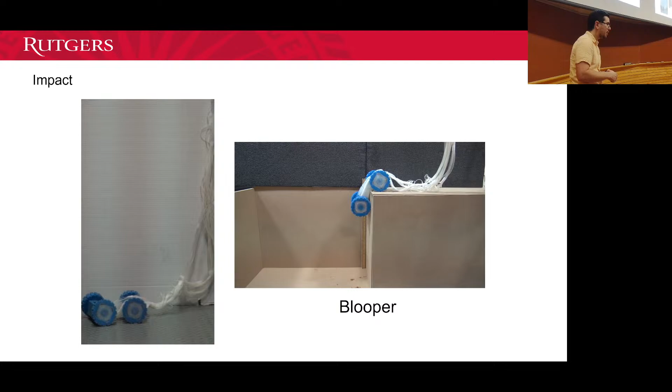We argued that this is something that has no metal in it. It's perfectly squishy. You can go in water. You can go over rocks. You can drop it from heights. You can have it roll off a cliff if you like. If you took your car, there are multiple reasons why this is a bad idea with larger objects. But yes, and then you see a wheel even pops off there.

But again, what I'm saying is we had this behavior that we were interested in understanding, and so once again, we found ourselves running some finite element analysis to say, hey, look, we understand what's going on. We took some images of us pressurizing these devices, and then we said, hey, look, this is how they click. But did we attempt to run a simulation with the rotating wheel? No.

Okay, we can let someone else do that. All right, and

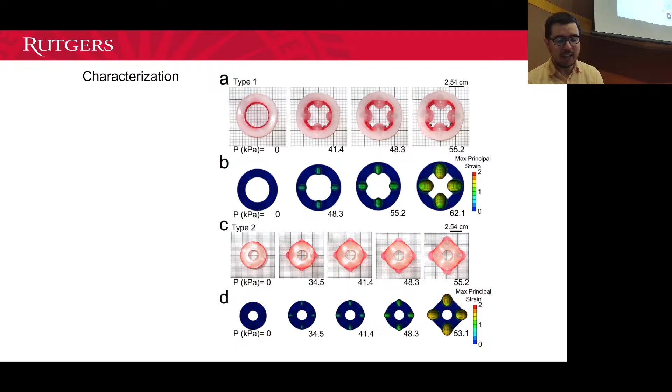the mantra that some experimentalists will say is the experiment always wins. Right? At this point in the class, we've talked about ground truth, we've talked about convergence, and when you have a functioning device, sometimes you've got to accept that it works before we understand all the physics and can model every little bit of it.

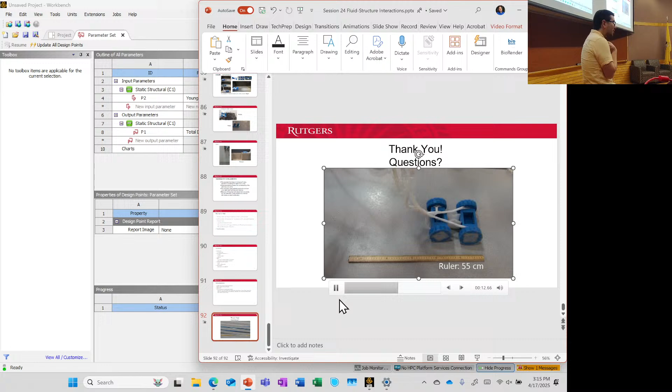I dream of the day when I personally can have calculations and simulations done before we build it. As an experimentalist, that's not happening. It hasn't happened yet in our lab, but I have aspirations and hopes that one day it will happen.

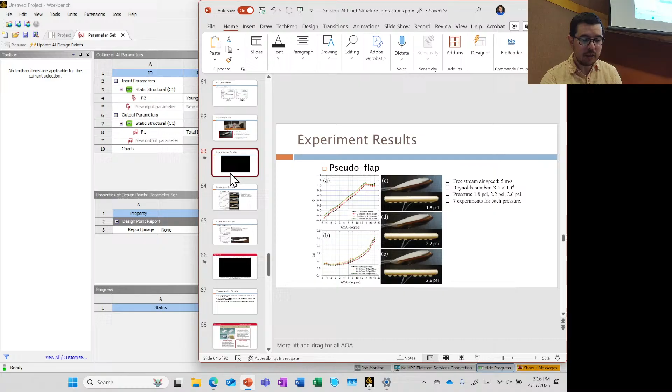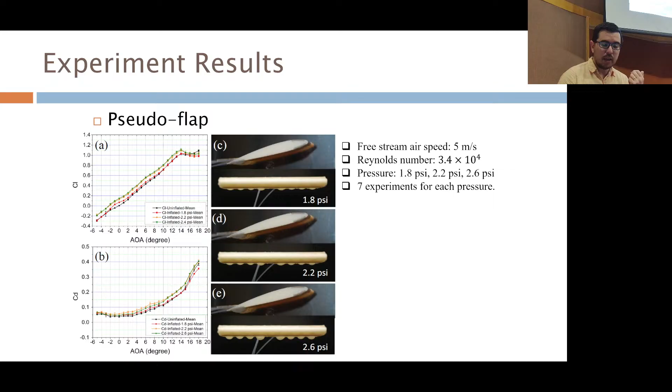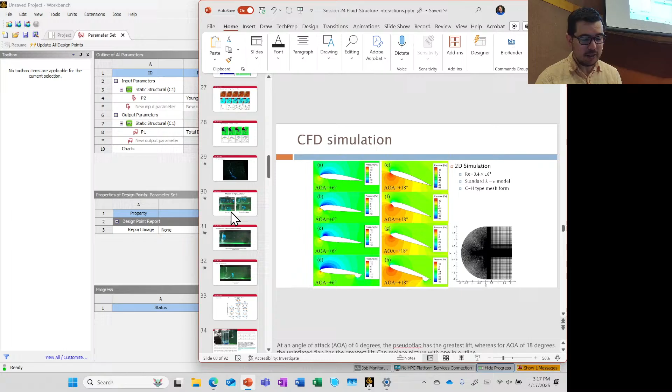And then finally, someday we will publish something on this work. Someday. But we haven't yet. Instead, we just had master's theses, which are really great. Students have graduated, but we haven't gotten this all straightened out. So what do you think we're looking at here? What does this look like?

the most efficient, requiring the least amount of energy to move underwater a given length. For a given size and given travel, it requires the least amount of energy. This is called cost of transport. So we spent a lot of time attempting to beat the jellyfish at its own game.

One of the tricks it plays is that when it puts down its bell, it sends off starting vortices that propel it. But when it lifts up its bell, it creates what's called a stopping vortex. And that stopping vortex, as the jellyfish moves forward, catches up to the underside of the jellyfish and gives it a little boost.

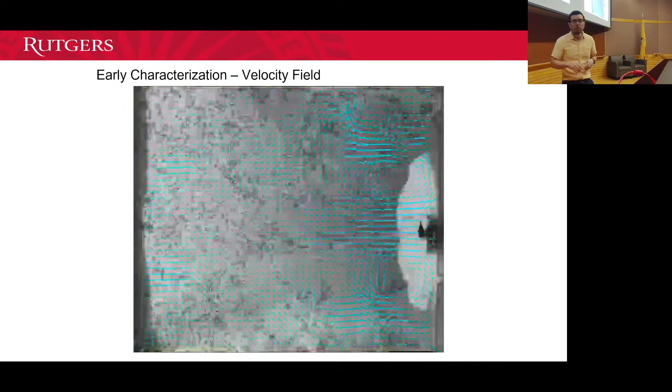These jellyfish are Aurelia, and not all jellyfish do the same thing. You've seen squirting animals and different types of things. A box jelly is different from this moon jellyfish, Aurelia aurita. Anyway, we haven't worked on it in a while, but we were trying to get a similar profile where you get this bump from the stopping vortex.

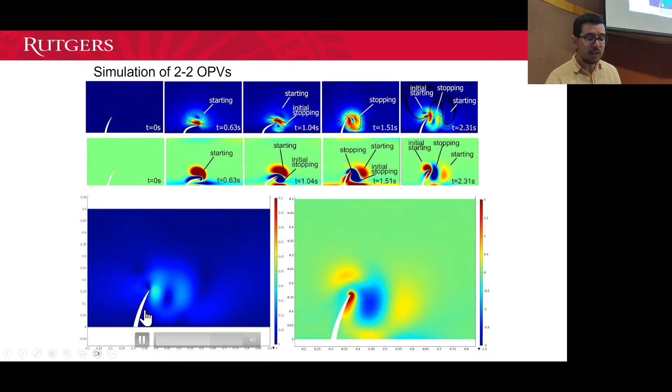And then we had multiple people doing fluid-structure interactions. Does this look familiar? In this case, you're actuating the fin and looking at the vortices that get shed. In this experiment, we just put some glitter in water and flapped this thing back and forth. And this is another jellyfish robot or actuator that we put in a tank. The tank is still there, and the particles may still be at the bottom, and the jellyfish is moving.

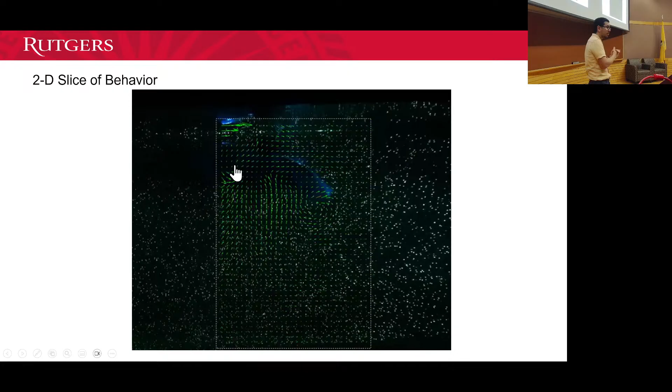So anyway, today the simulation part was long, but building these things takes even more time. And the simulation was really quite limited. It was a 2D slice, not capturing all this interesting behavior, the 3D nature that you have in experiments.